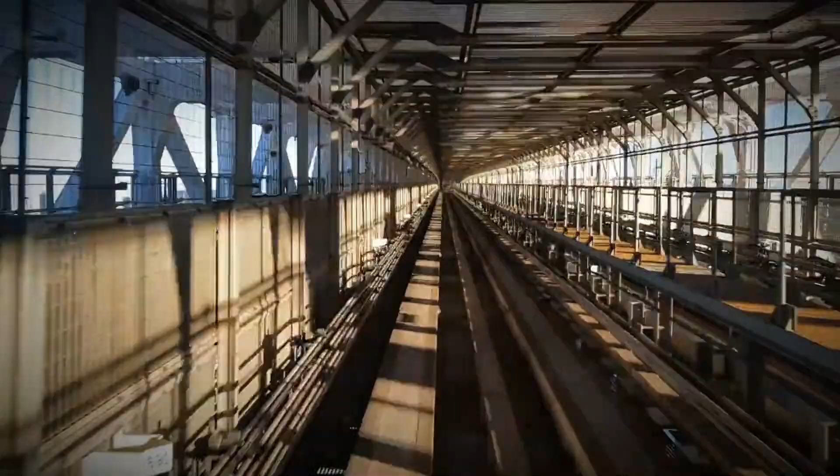Every single time you fill up your car, board a flight, or walk on a freshly paved road, you are using something that started out as a thick, smelly, almost useless liquid pulled from deep underground. It looks unimpressive, dark, dense, and has no obvious purpose in its raw state. And yet this one substance quietly powers nearly every form of transportation on Earth, heats millions of homes, and forms the raw material for plastics, medicines, and synthetic fabrics.

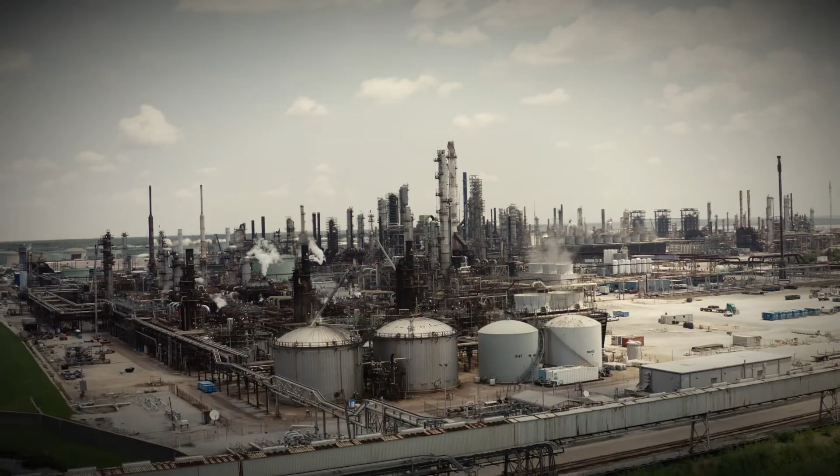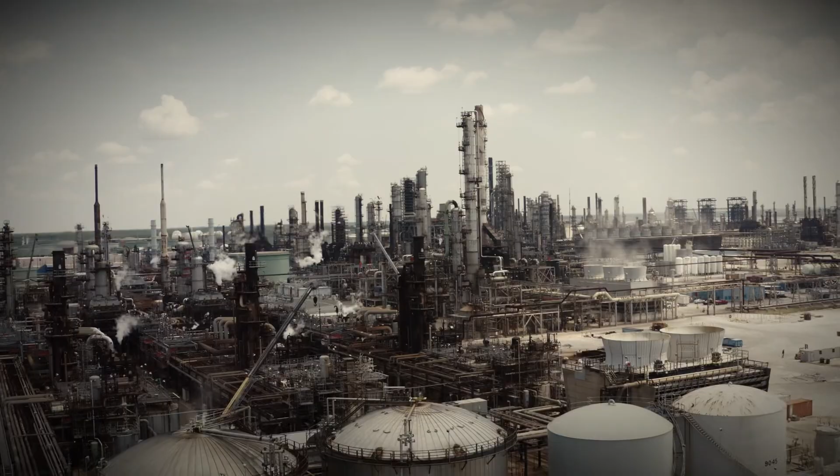Today, we are breaking down exactly how crude oil refining works, from its surprising origins in the 1800s to the massive industrial science running behind the walls of modern refineries.

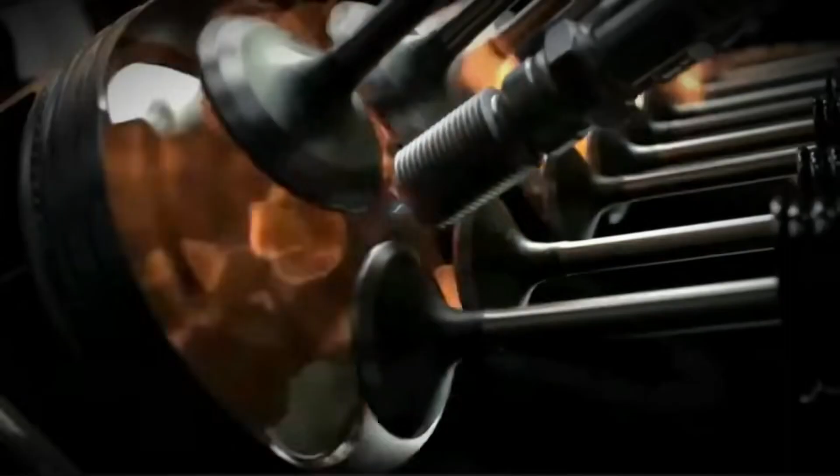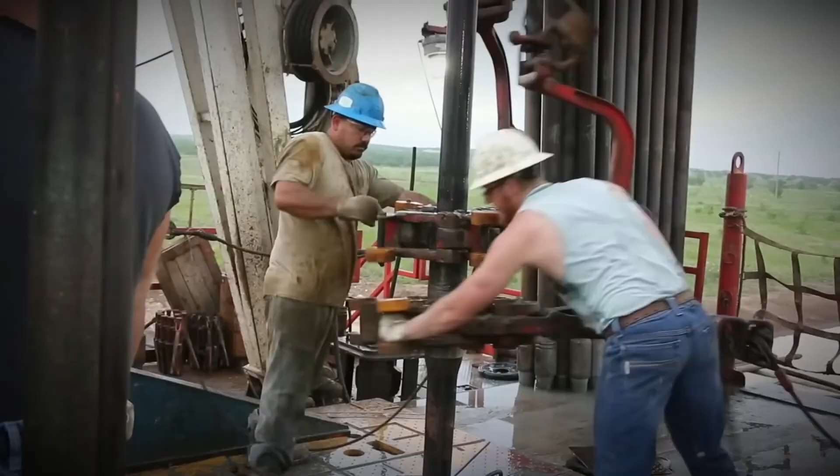Here is something most people do not know. Oil refining was not invented to power cars. It was invented to power lamps. Back in 1859, Edwin Drake drilled the first successful commercial oil well in Titusville, Pennsylvania. At the time, people were not thinking about gasoline, that word barely existed yet. What they wanted was kerosene, a cleaner and cheaper fuel for lighting homes at night. Whale oil, which had been the dominant lamp fuel for generations, was becoming expensive and difficult to source. Crude oil offered a solution.

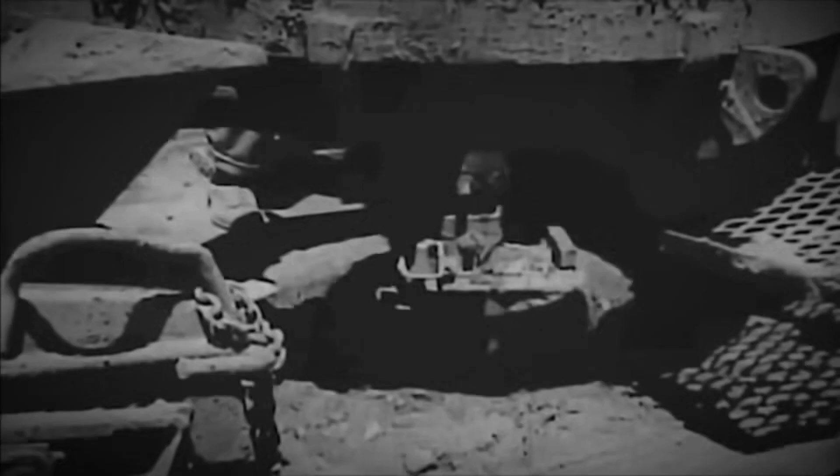The early refining process was remarkably simple: heat crude oil in a basic metal still, let the kerosene evaporate, collect it in a separate container, and discard the rest. Most of the oil was considered waste, a messy byproduct that nobody wanted.

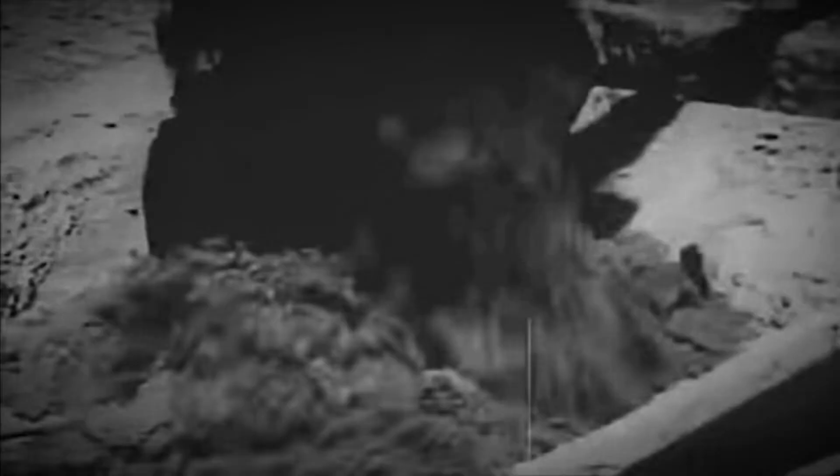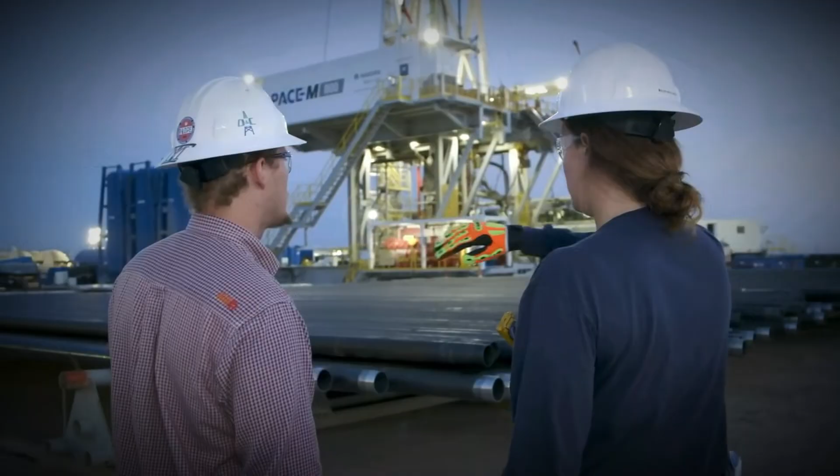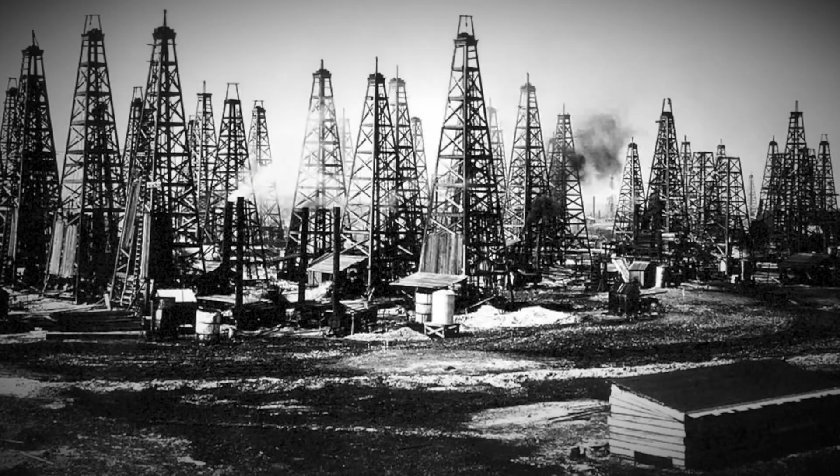Then everything changed. In 1908, Henry Ford introduced the Model T, the first automobile built for ordinary working people. Within a few years, cars were everywhere. Suddenly, millions of people needed gasoline, and refineries that had been built to produce kerosene were nowhere near ready for that shift. The pressure to produce more fuel, more efficiently, drove an explosion of refining technology and engineering innovation across the entire industry. What started as a simple distillation process quickly evolved into one of the most complex and precisely engineered industrial systems ever built by human hands.

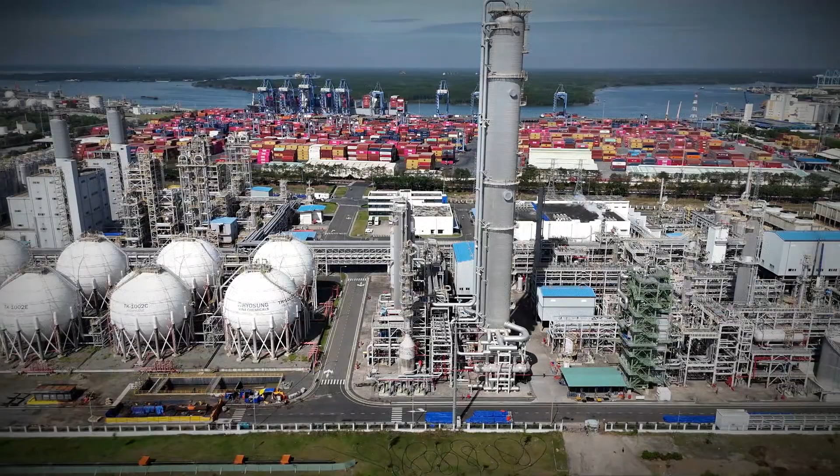Today, the United States alone operates 132 refineries with a combined capacity of over 18 million barrels per day, and global refinery capacity exceeds 100 million barrels per day. All of it traces back to that first well in Pennsylvania and the simple human need to keep the lights on.

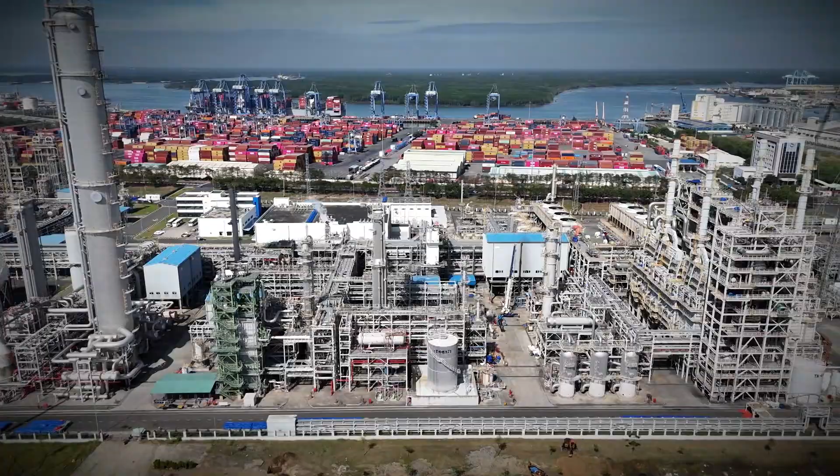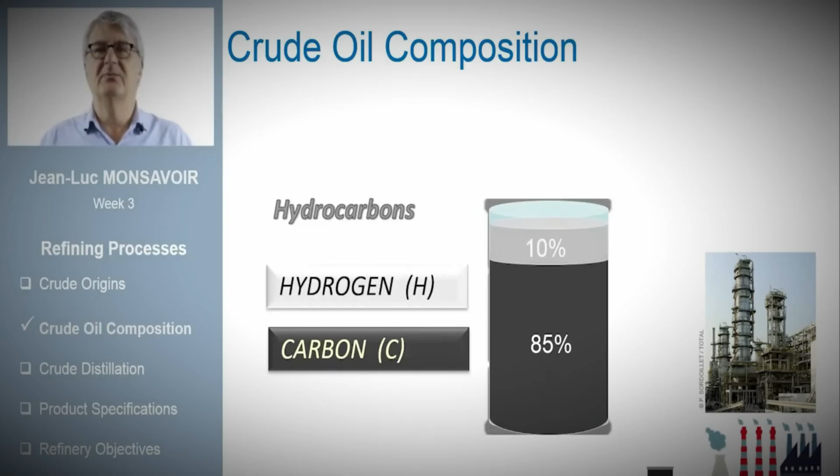Before you can understand how refining works, you need to understand what crude oil actually is, because it is not a single substance. Crude oil is a mixture of hundreds of different hydrocarbon molecules, chains of hydrogen and carbon atoms bonded together in varying lengths. Some of these chains are short and light, and they evaporate easily. Others are long and heavy, and they behave more like wax or thick syrup. This difference in molecular size is critical, because the lighter the molecule, the more valuable the fuel it produces.

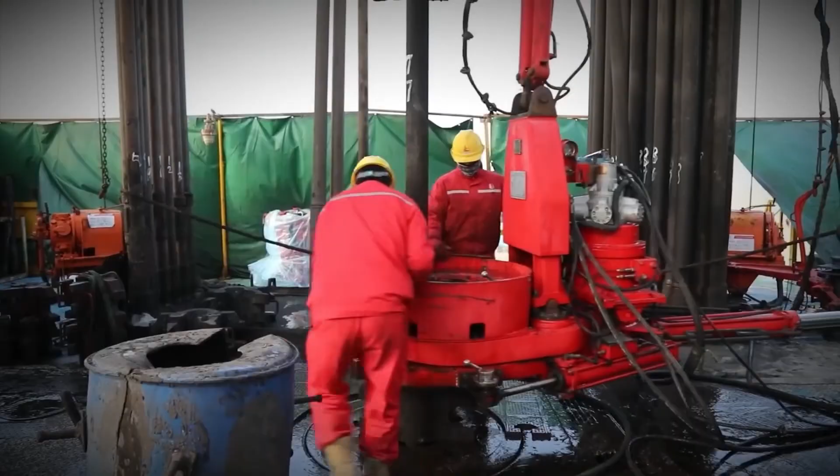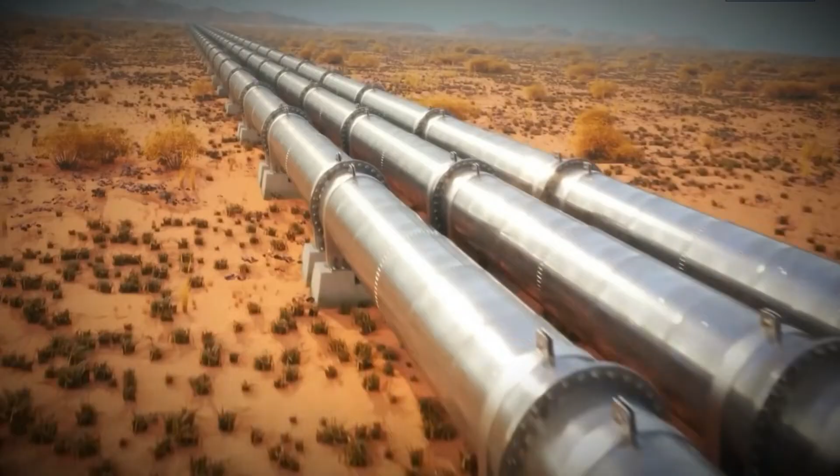Light crude oils yield gasoline and jet fuel more easily, while heavier crude oils require significant additional processing before they become useful. Crude is also classified by its density, measured by what is called API gravity, and by its sulfur content. Low-sulfur crude oil is called sweet crude. High-sulfur crude is called sour.

Sweet crude is easier, faster, and cheaper to refine, which is why it consistently commands a higher price on global energy markets. The first major step in turning crude oil into something useful is separation, achieved through a process called fractional distillation. Inside a refinery, crude oil is pumped into a furnace and heated to around 350 to 400 degrees Celsius until most of it vaporizes.

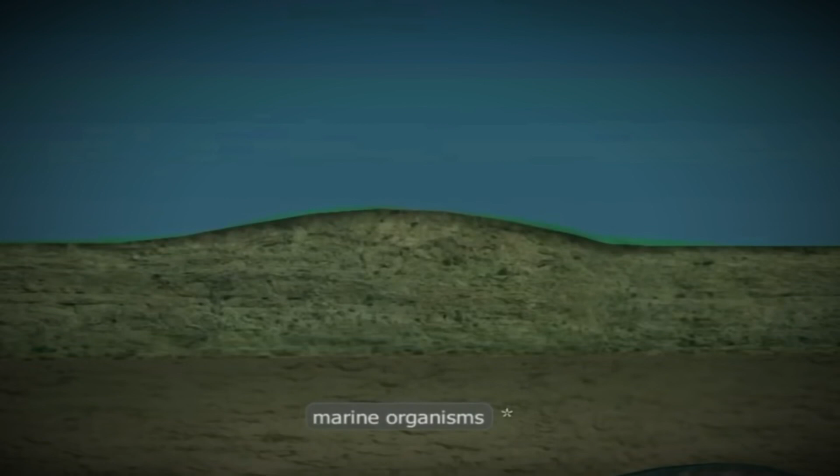That hot vapor is then pushed into a distillation column, a towering steel structure that can stand over 30 meters tall. Inside the column, a remarkable thing happens through nothing more than basic physics. Because different hydrocarbon molecules have different boiling points, they naturally separate as the vapor rises and cools.

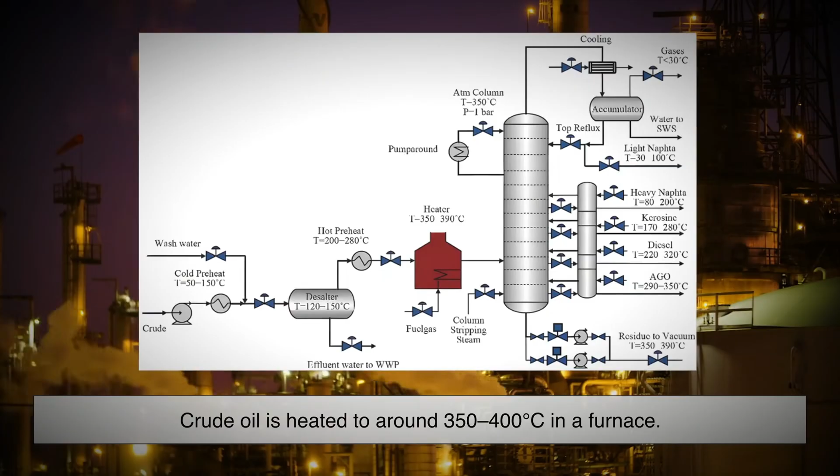Light molecules travel higher before they condense into liquid form. Heavier molecules condense lower down. Each level of the column collects a different fraction of the crude. From top to bottom, the column separates out refinery gases like propane and butane, then gasoline, then naphtha, then kerosene and jet fuel, then diesel, then heavy gas oil, and finally a thick dark residue at the very bottom.

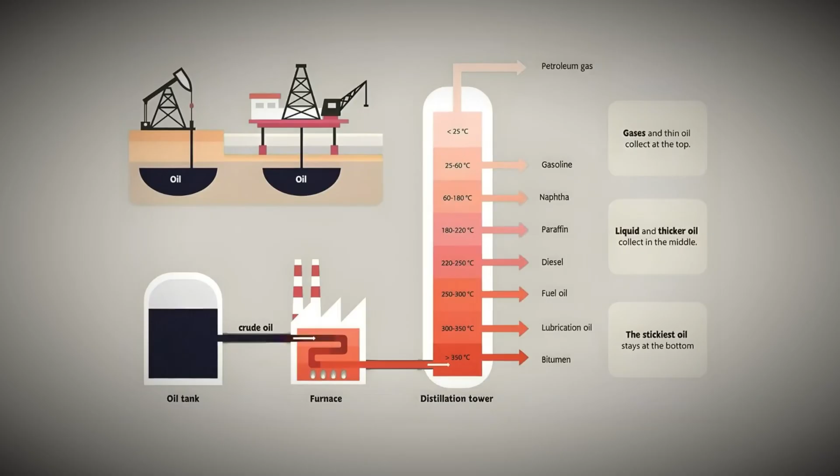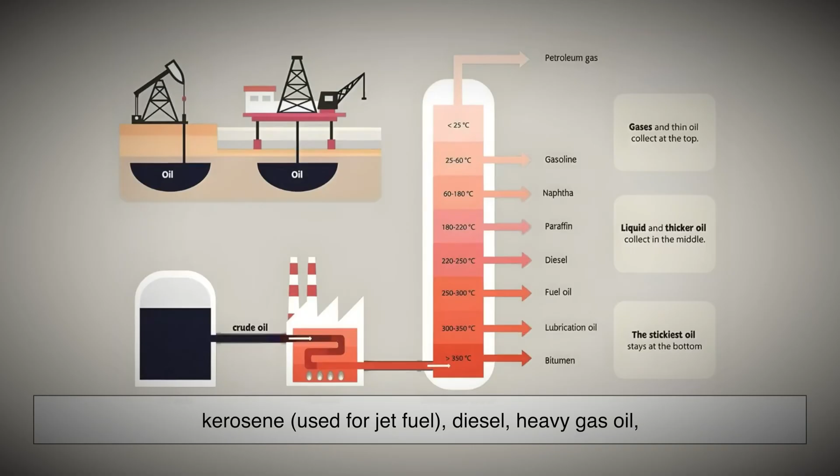Here is a fact that captures just how efficient modern distillation has become. U.S. refineries produce an average of 45 gallons of finished products from every 42-gallon barrel of crude they process. That extra volume comes from what the industry calls processing gain. Refined products are simply less dense than the raw crude they came from.

But distillation only separates what already exists in the crude. And the problem is that crude oil naturally contains far more heavy molecules than the modern world needs. Gasoline and jet fuel are in constant high demand, while heavy fuel oils are far less valuable. So refiners take a critical extra step.

They break the heavy molecules apart in a process called cracking. Using carefully controlled combinations of heat, pressure, and chemical catalysts, large hydrocarbon chains are split into smaller, lighter, more valuable ones. One of the most widely used methods is fluid catalytic cracking, where heavy gas oil is mixed with a fine, superheated catalyst powder that triggers chemical reactions, splitting long chains into shorter ones, dramatically increasing the yield of gasoline and lighter fuels.

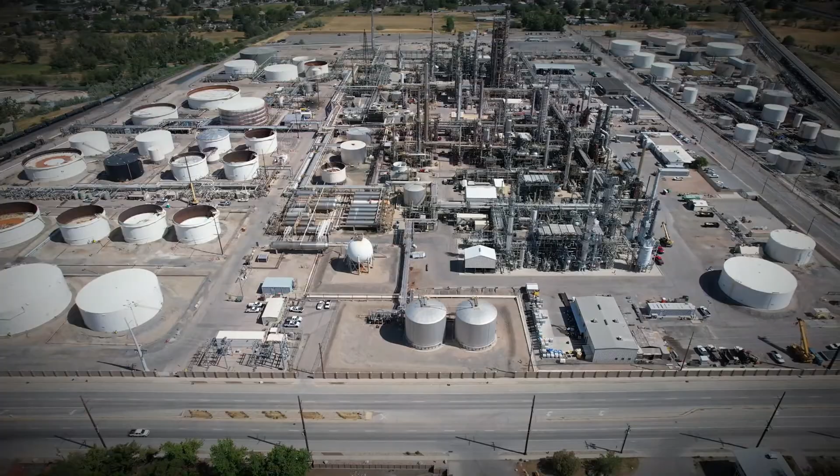Another method, hydrocracking, injects hydrogen under high pressure, which not only breaks molecules apart, but simultaneously strips out sulfur and other impurities in the same step. Without cracking, global refineries could not produce anywhere near enough gasoline or jet fuel to meet world demand. The entire modern transportation system depends entirely on it.

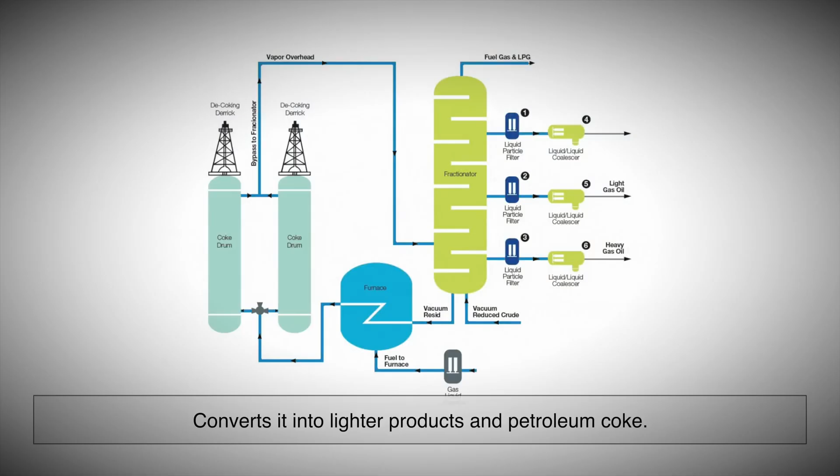Not all refining processes involve breaking molecules. Some involve rearranging them entirely. Catalytic reforming takes low-value naphtha, a fraction that comes out of distillation but has limited direct use, and restructures its molecular shapes using heat, pressure, and a catalyst. Straight-chain hydrocarbon molecules are converted into ring-shaped or branch structures that burn far more smoothly and efficiently inside an engine.

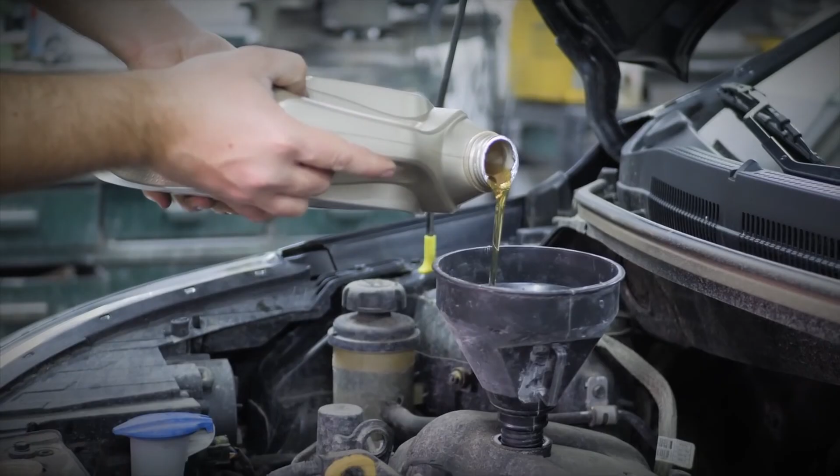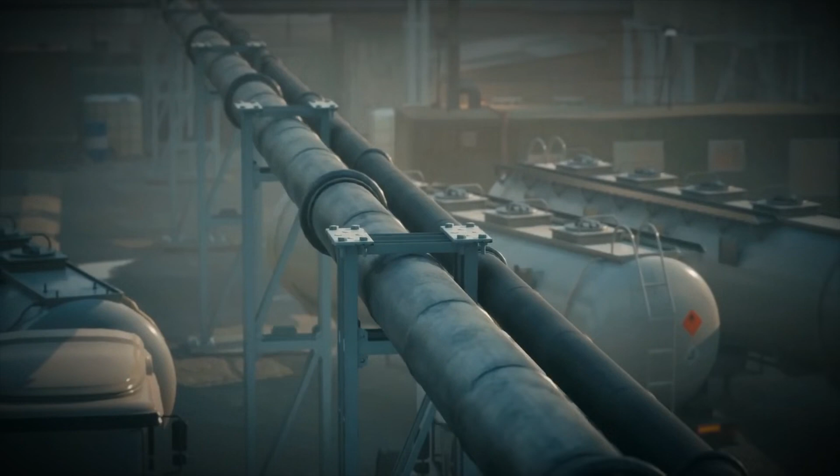This directly increases a fuel's octane rating, which measures its resistance to premature ignition or knocking inside cylinders. High-octane fuel allows modern engines to run at full performance without damage. As a useful byproduct, catalytic reforming also releases hydrogen, which is then used in the cleaning stages downstream.

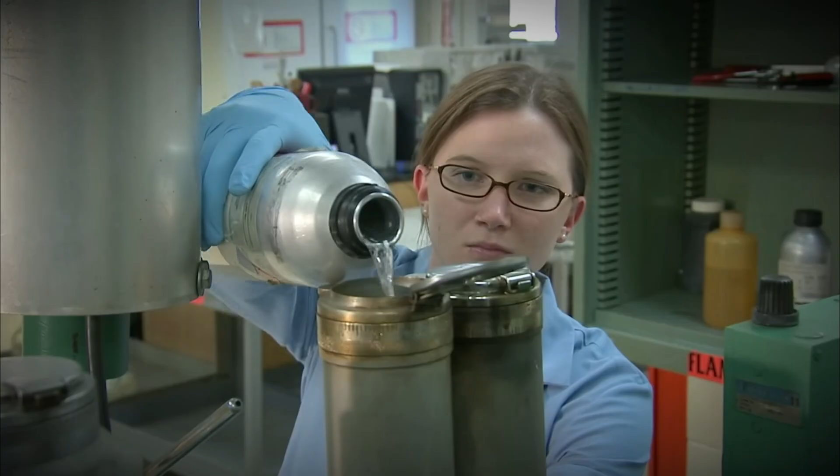Because crude oil contains sulfur, and burning sulfur produces sulfur dioxide, a serious air pollutant and a major driver of acid rain, every fuel must pass through a cleaning stage called hydrotreating before it leaves the refinery. In this step, hydrogen chemically bonds with sulfur compounds and removes them from the fuel stream. Today's environmental regulations are extremely demanding, with many countries requiring diesel fuel with sulfur levels no higher than 10 to 15 parts per million, and refineries are precisely engineered to meet those strict standards.